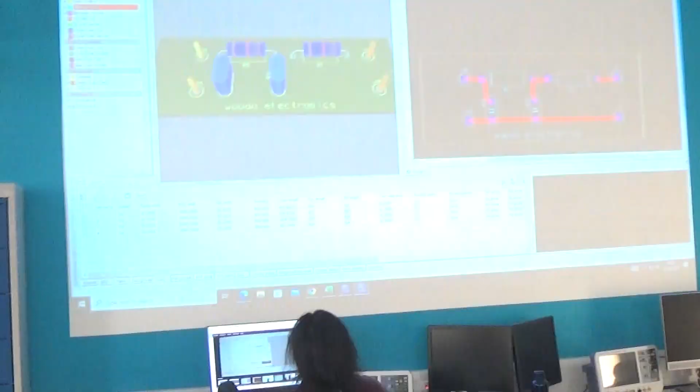Now, if we look at this lovely little circuit that John's created here, we have a couple of resistors, a couple of terminals here, and we can see on our design toolbox on the left hand side of the screen that we have all our layers that are visible. So we can see that we have our copper top and our copper bottom, which is where we draw our traces.

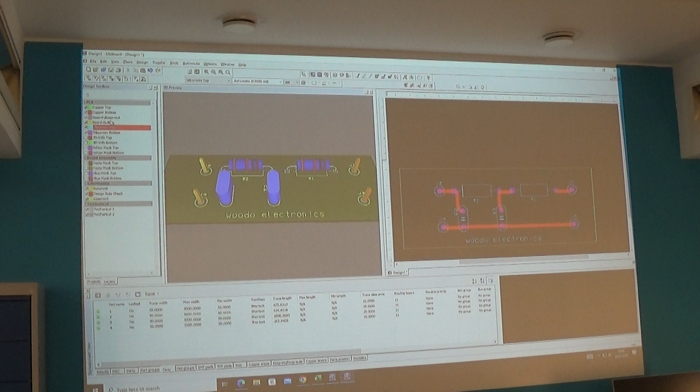We have a keep in and keep out layer, which allows you to control how ground pours and things happen. You have silk screens, a board outline which shows you the shape of the board. Everything is available in this design toolbox.

So when we've designed this board, what will happen is we will do an export in a standard file format known as Gerber files, which breaks down every single one of those layers into a separate file. And inside that separate file it has got a very common and understandable format so that other machines and computer software can import it exactly how you intended, because it's a CAD file really.

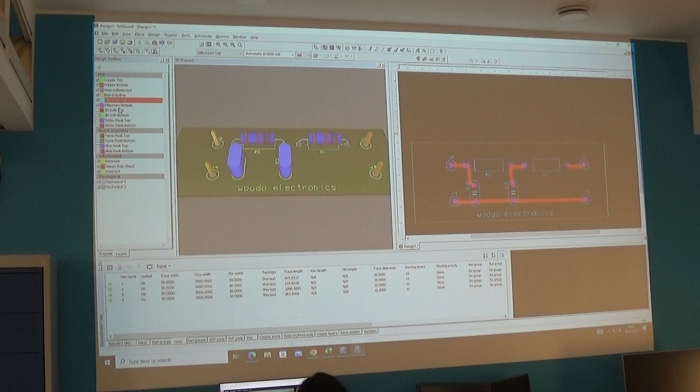So what we're going to end up with here is 1, 2, 3, 4, 5, 6, at least 6 separate files, probably more, each describing its own layer. And then on top of that, we need to know where our holes are going to be drilled, so we're also going to export a drill file.

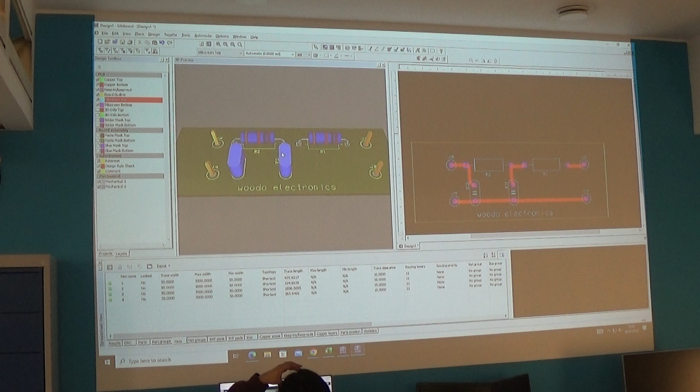So to go through this process, very simple. We've designed our PCB, we're happy with how it looks, we've done all our validation checks, now we want to send it to the fab plant. So what we'll do is we'll go File and we'll go Export. And then as you can see here, by default, we're going to do a fabrication export.

Interestingly, and this has always been the case and I don't know why, when you capture a schematic you tend to work in millimeters. And when you design a PCB it all goes into imperial. Fab plants tend to like to work in imperial, so it's just the way it is.

Now what we've got up here, the options, can be left at default. I really suggest that you don't mess with these and I'll explain why. We just leave the defaults. What we're saying is we want this standard of Gerber file and we want to include our NC drill file. And our NC drill file is where our holes get placed.

Here's your first warning. If you design a through-hole board and you do not include an NC drill file, you will get your board back and it will look beautiful, but there will be no holes in it. Just like the gentleman 2 years ago. It's happened many times. You will not be able to put your components through.

So then you think, I'll drill the holes myself. Sounds easy, actually very difficult. So that's something you have to do. If you're designing a through-hole board, you have to include a drill file.

Another thing that I just want to point out right now is on here, you've got options like reflection and negative image. Be very careful if you decide to change these options, because what will happen is it will flip your PCB from how you see it, and it will do a mirror image of it.

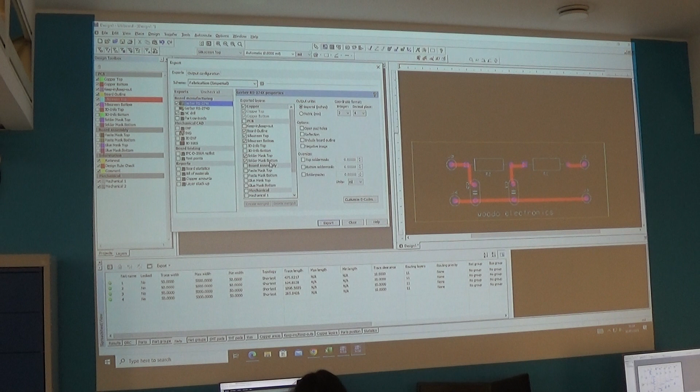Solder mask top and solder mask bottom. If I don't include them, all the copper is going to be exposed, and eventually it will all oxidize and it'll be a horrible board. So we need to make sure that these things are all exported.

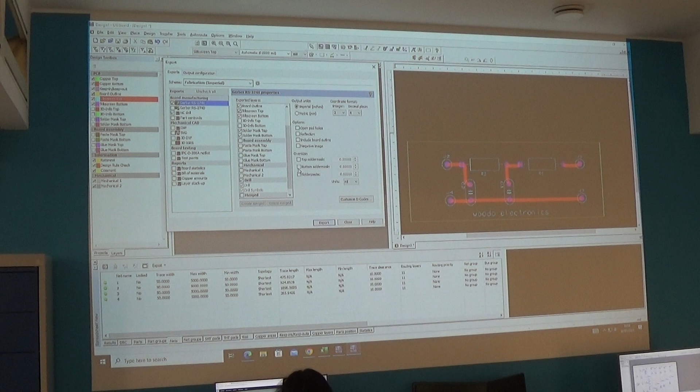And also, if you want to not only produce your board, but also have the components placed on it, then you need to submit to the manufacturer a paste mask, potentially a glue mask as well, so that they know where they have to put the solder paste on the board in an automated process.

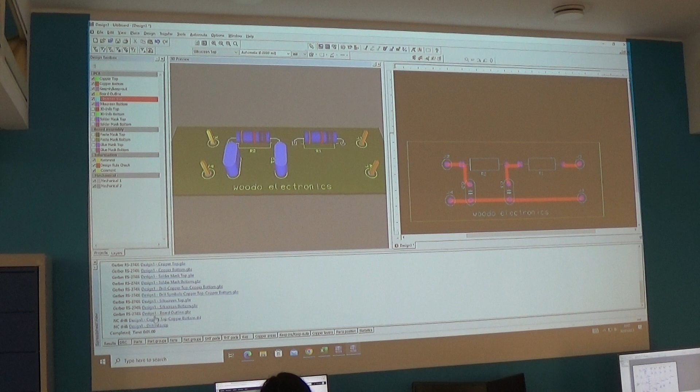So we leave everything as default. We're happy with our Gerber file, happy with our NC drill file, and now I'm going to export. So I press export. Down here you can see it's exported everything. And then if I click on any one of these, it should load up where it saved those files.

Right. So as you can see now, I've got a separate file for every single one of those layers. What I'll do now is select them all and zip them up into one compressed file like that. And that file is what I'm going to send to my manufacturer.